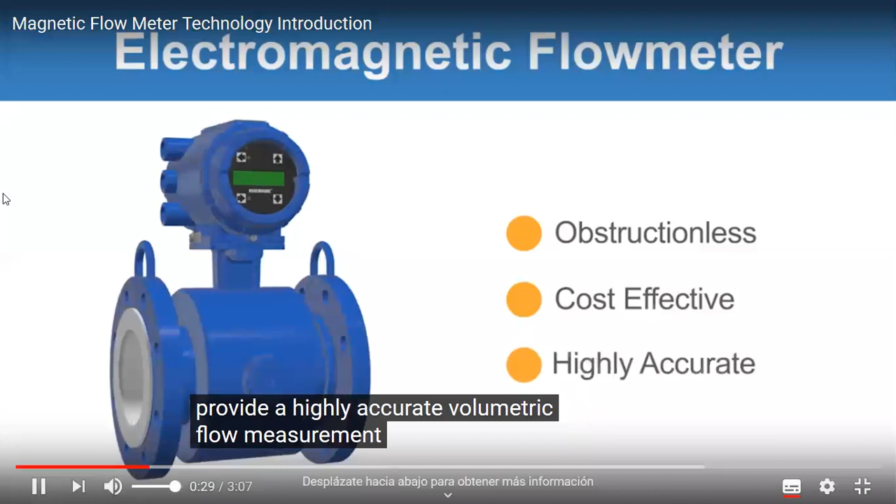Oftentimes referred to as a mag meter. Mag meters are selected because they are obstructionless, cost-effective for aggressive chemicals and slurries, and provide a highly accurate volumetric flow measurement. Mag meters are comprised of a transmitter and sensor that together measure the flow. The mag meter sensor is placed in line and measures an induced voltage generated by the fluid as it flows through the pipe. The transmitter takes the measured voltage generated by the sensor, converts the voltage into a flow measurement, and transmits that flow measurement to a control system.

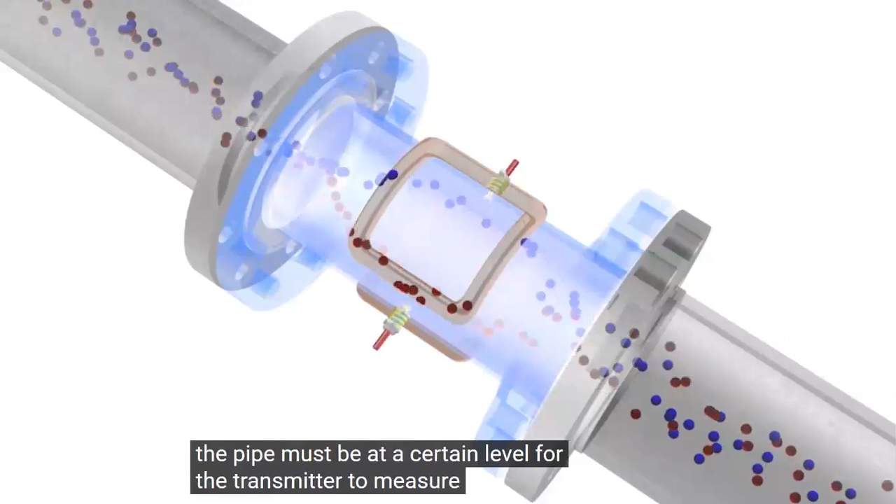To make the flow measurement, the mag meter utilizes a set of coils and a pair of electrodes. The mag meter's coils are driven by the transmitter with an applied current. Once powered, a magnetic field is formed between both coils. Once the pipe is full and the fluid begins to flow, the force of the magnetic field causes the negatively and positively charged particles of the fluid to separate as they pass through the magnetic field. This separation causes an induced voltage to be formed between the electrodes in the sensor. The conductivity or charge of the fluid in the pipe must be at a certain level for the transmitter to measure the induced voltage at the electrodes.

This flow principle is known as Faraday's law, mathematically defined by the equation E = kBDV, where the induced voltage E is directly proportional to the velocity V of the fluid moving through the magnetic field B. The induced voltage is carried to the transmitter through the electrode circuit. The transmitter then converts this voltage into a quantifiable flow velocity.

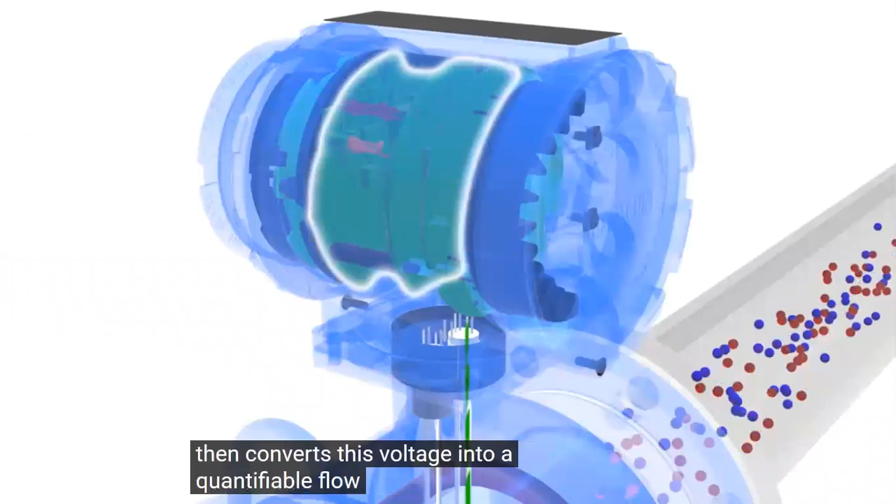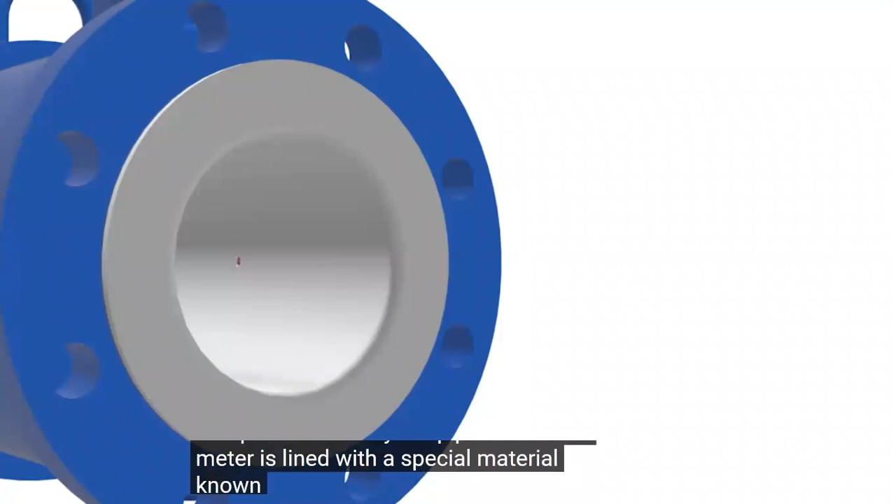With the known velocity along with the area of the pipe, the volumetric flow rate of the fluid is calculated. To prevent electrical shorts of the sensing component circuitry, the pipe of the flow meter is lined with a special material known as a liner. This liner, along with a selection of the proper electrode materials, is important to protect the sensor against abrasive and corrosive chemicals and solids.

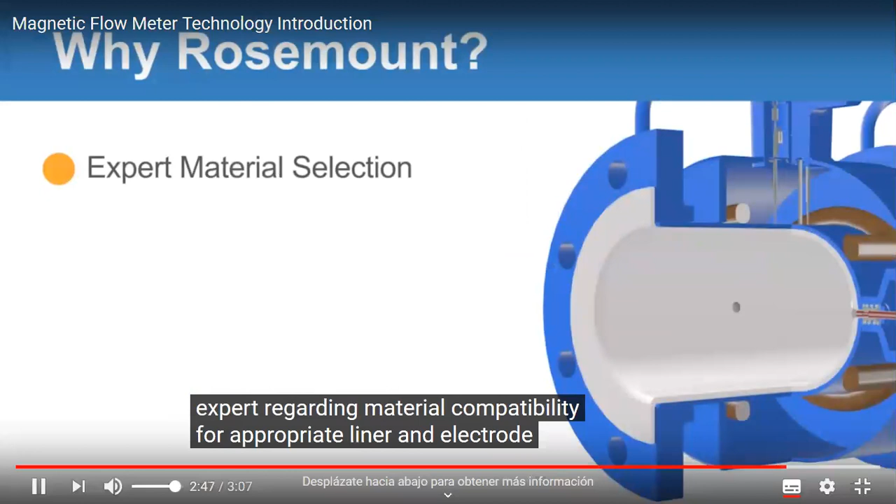One historical limitation of mag meters is the impact of process noise. Process noise occurs when particulates impacting the electrode interfere with the induced voltage measurement, generating a false reading. Rosemount has become a true expert regarding material compatibility for appropriate liner and electrode selection, and has advanced digital signal processing software to provide maximum measurement reliability for even the most challenging applications. Emerson Flow Measurement Technology.

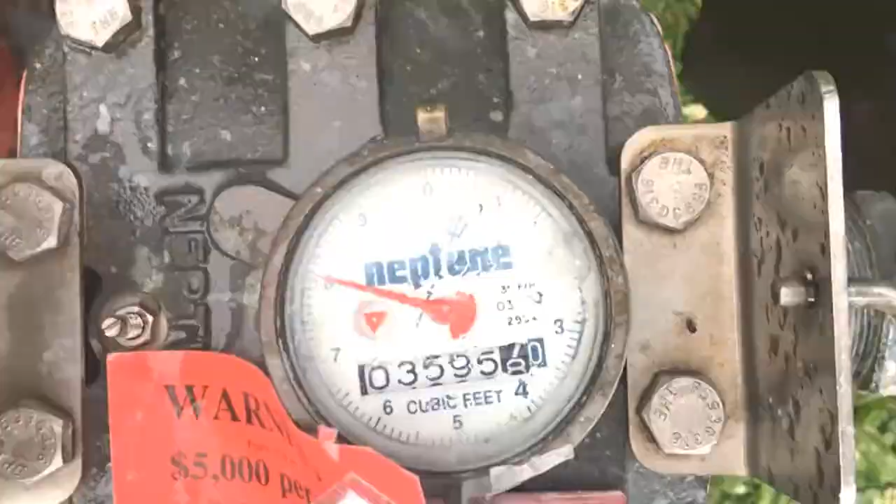Hey, I'm Grady. Today on Practical Engineering, we're building a magnetic flow meter. From metering the dose of a medicine in an IV, to measuring the flow of irrigation water on a farm, to tracking your fuel fill-up, flow meters play a role in nearly every area of our lives. In fact, there's probably a meter outside your home counting your water usage for your monthly utility bill.

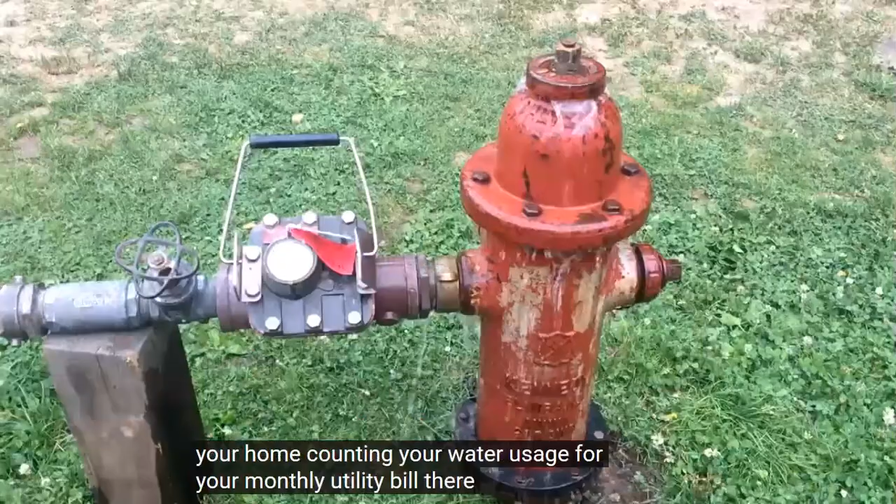There are a whole host of ways we can measure flow, but today I want to talk about a method I think is particularly fascinating: the magnetic flow meter. We'll walk through some of the electrical engineering behind this ingenious device and try to overcome the challenges that arise when the real world doesn't quite match the theory. But the theory comes first, so we'll start at the beginning.

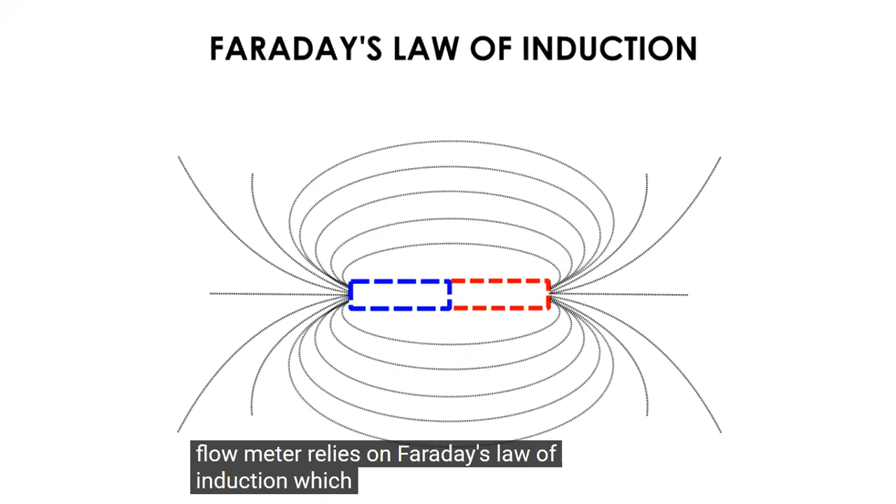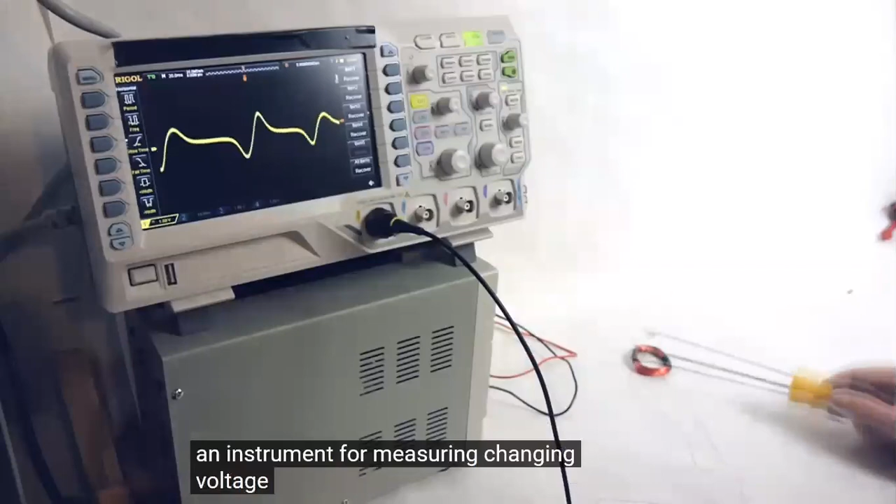A magnetic flow meter relies on Faraday's law of induction, which basically says this: moving a conductor through a magnetic field will generate an electromotive force, which is proportional to the velocity. Let's break that down just a bit with an example. I've got a magnet and a conductor, in this case a coil of wire. The conductor is connected to a new toy in the shop, an oscilloscope, which is an instrument for measuring changing voltage and displaying it on a screen. For example, here's a typical AC sine wave similar to what you'd measure at a wall outlet.

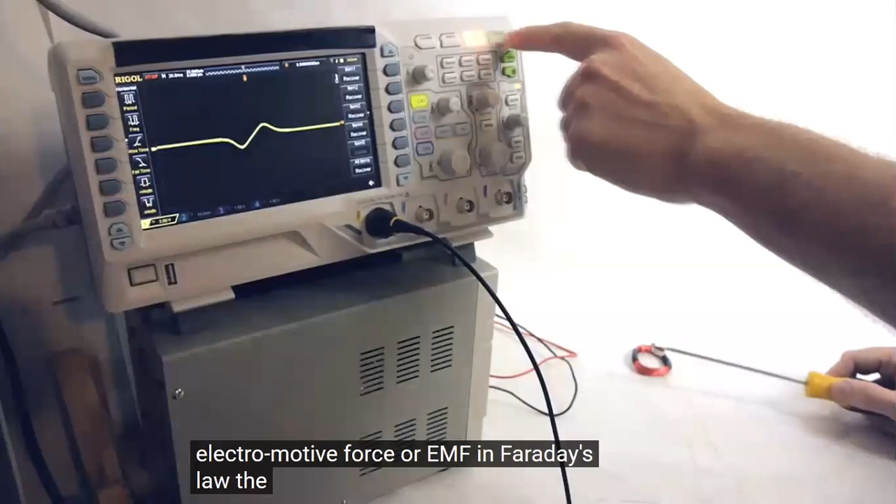If I keep the conductor still within the magnetic field, nothing happens. But as soon as I move the magnet, we see a spike in voltage. This is the electromotive force, or EMF, in Faraday's law. The faster the coil passes through the magnetic field, the higher the voltage spikes, demonstrating that the EMF is proportional to the velocity. A magnetic flow meter works exactly the same way, except instead of wire, the conductor is a fluid in a pipe.

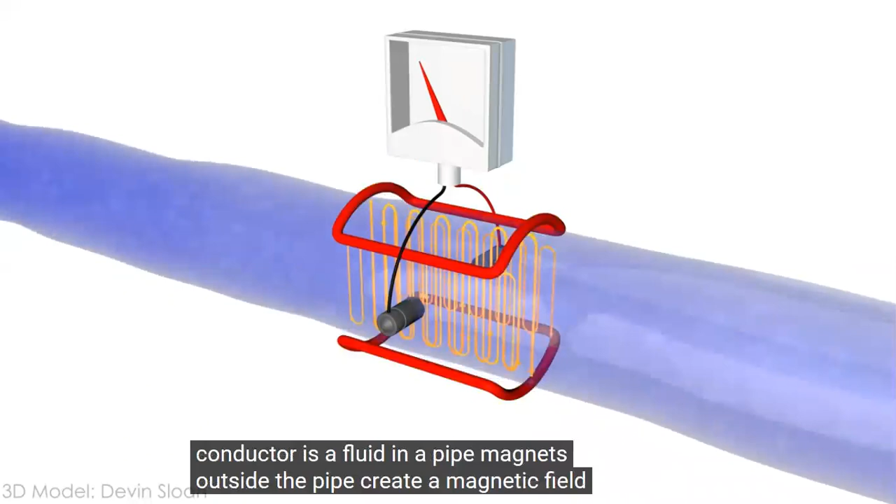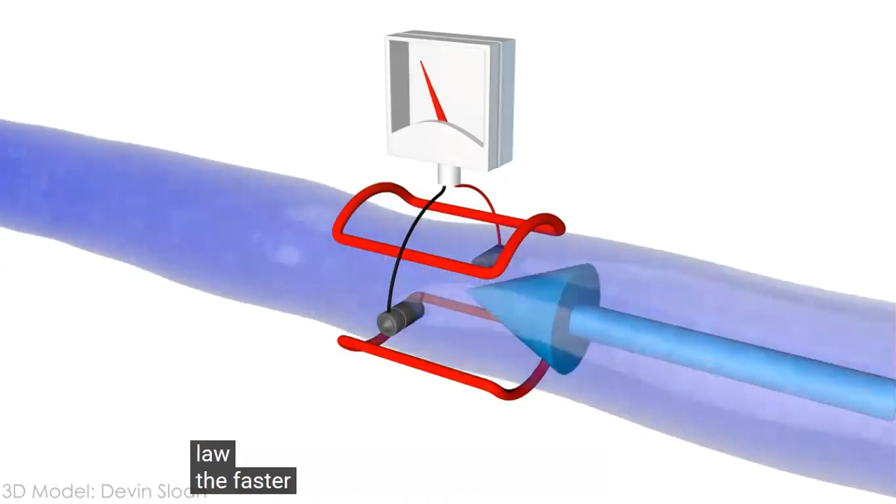Magnets outside the pipe create a magnetic field. Electrodes are located perpendicular to the magnets. A conductive fluid moving through the pipe will generate a voltage between the electrodes due to Faraday's law. The faster the fluid moves through the pipe, the higher the voltage. Once you know the velocity of the fluid, you can calculate flow using the cross-sectional area of the pipe. It seems pretty straightforward, but let's see if it really works.

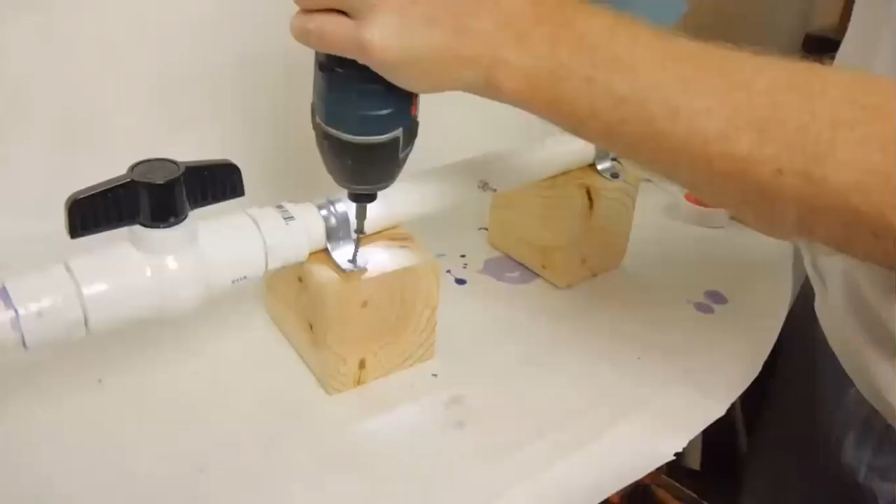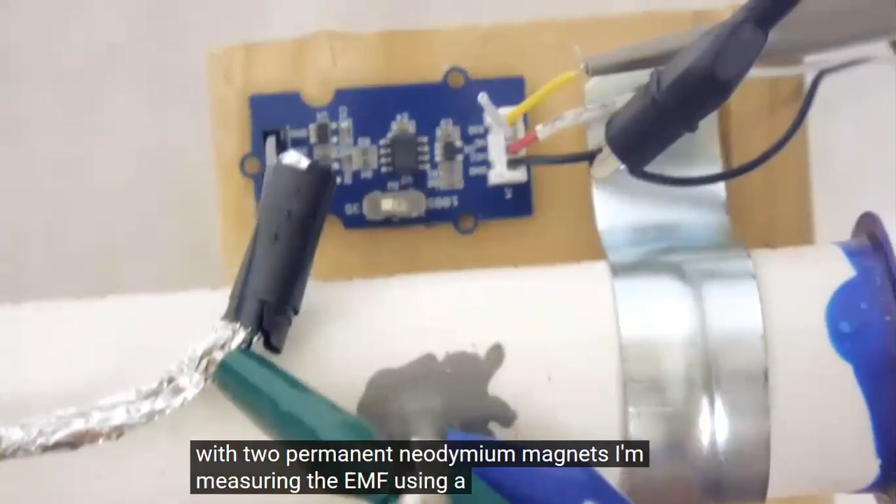I can control the flow of water using this valve. Two stainless steel bolts serve as electrodes to measure the EMF. And to create the magnetic field, I'm starting with two permanent neodymium magnets. I'm measuring the EMF using a differential amplifier to boost the signal into my oscilloscope. Watch what happens when I start to let the water flow through the pipe.

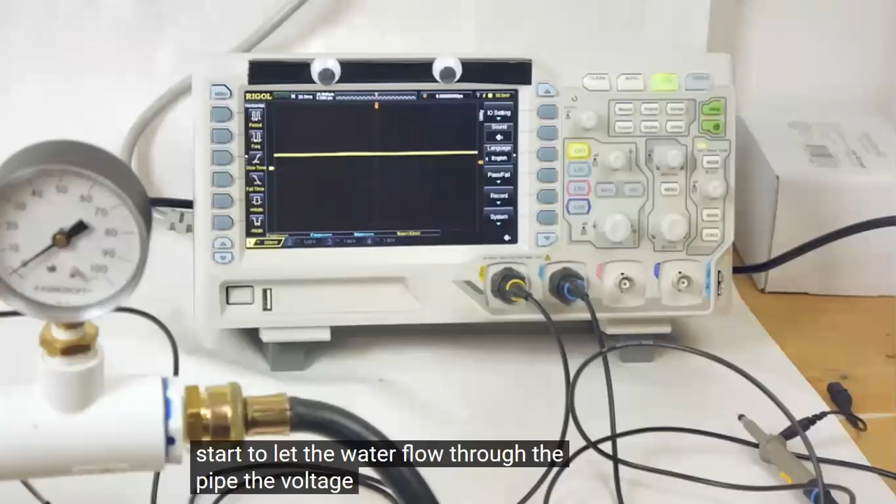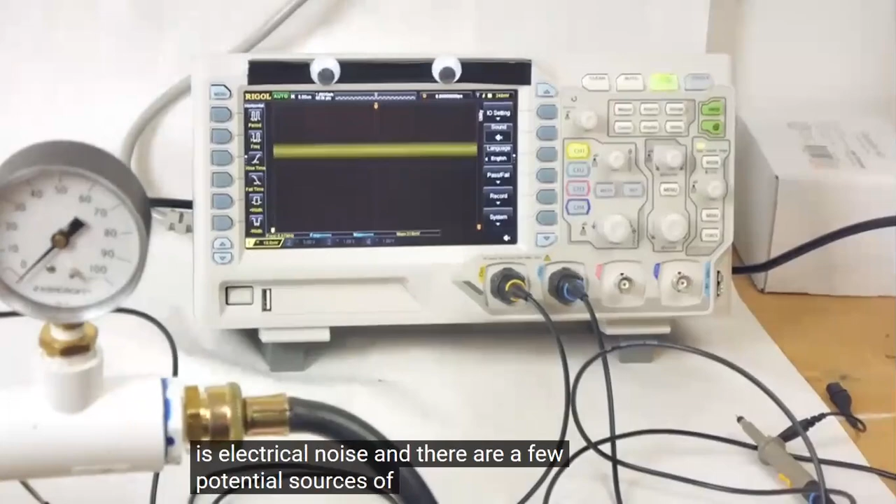The voltage jumps. We're definitely getting an electrical response to the flow of water, but you can see that we have a fairly noisy signal. It would be a major challenge to try and convert this signal into a flow reading. The problem is electrical noise, and there are a few potential sources of noise here. First, depending on the fluid chemistry and the type of metal used for the electrodes, an electrolytic reaction between the liquid and the electrode can generate an electric potential. Second, stray voltages can sometimes exist within the fluid from other equipment along the pipe, like the pump.

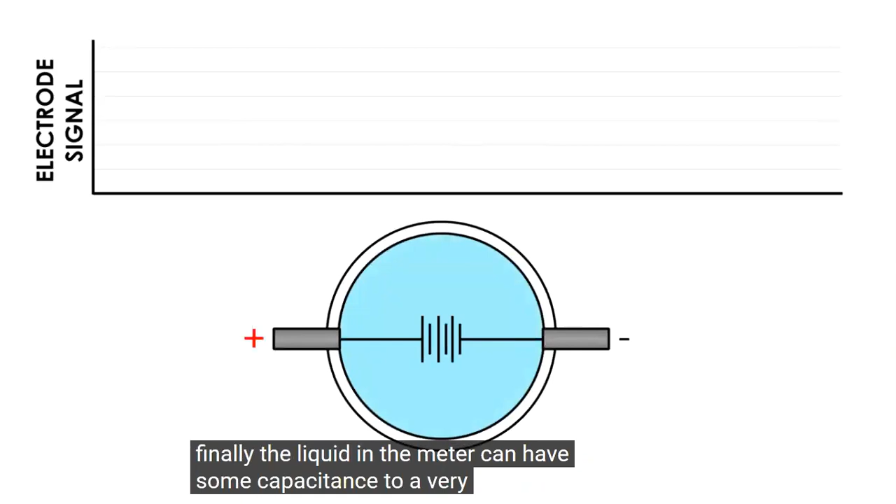Finally, the liquid in the meter can have some capacitance. To a very limited extent, it can actually charge up like a battery, which can create noise in the voltage signal between the electrodes. The problem is there's no way to know what part of the signal is due to the flow and what part is just noise.

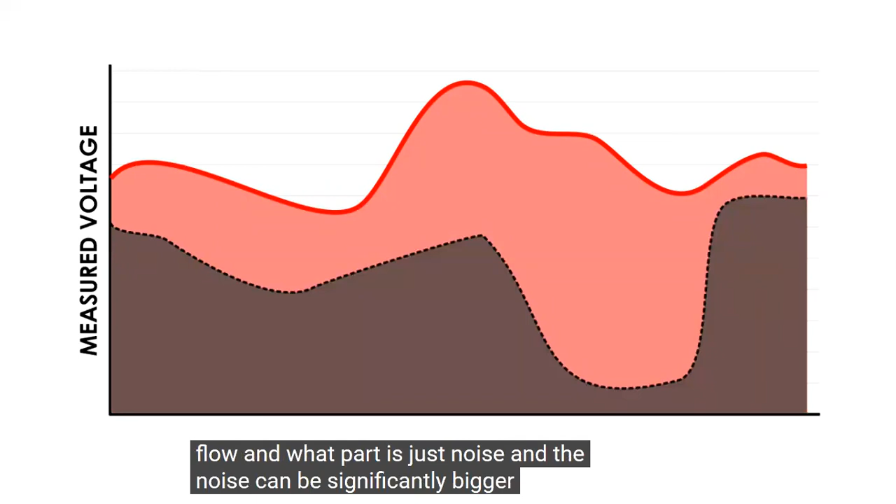And the noise can be significantly bigger than the part of the signal we actually care about. In electrical engineering, we would say that the signal-to-noise ratio is low. In other words, the theory behind the magnetic flow meter is sound, but the real world is getting in the way of things. This is where the physicists throw up their hands and the electrical engineers step in. And the electrical engineers have found that one way to avoid the issues mentioned above is to change the magnetic field over time. Here's how it works.

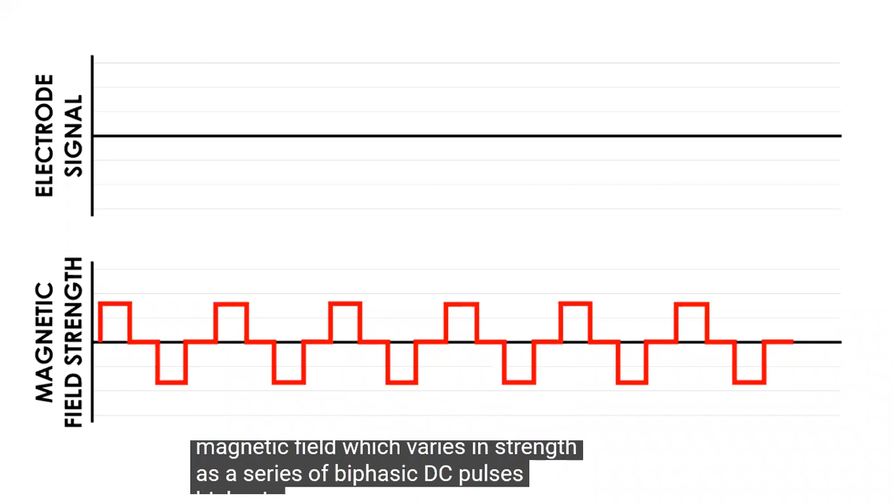This is a graph of a magnetic field which varies in strength as a series of biphasic DC pulses. Biphasic because it has negative and positive pulses, and DC because unlike a typical AC sine wave, which is constantly changing, the waveform only has two values, on or off.

Above is an example of the resulting EMF from the magnetic flow meter. Remember, we only care about the portion of the EMF generated by the magnetic field, since this is the only part of the signal which is proportional to the velocity of the fluid. Everything else is just noise.

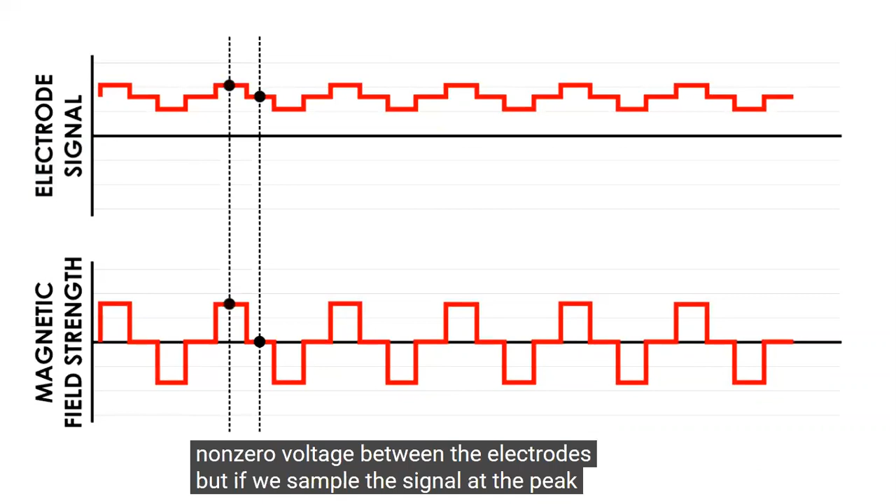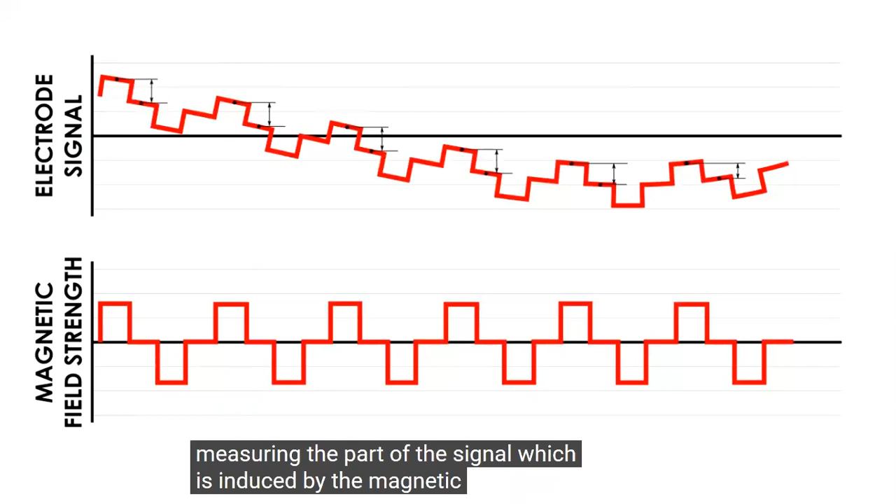Notice that even when there's no magnetic field, there may still be a non-zero voltage between the electrodes. But if we sample the signal at the peak of the magnetic field and subtract the voltage measured when the magnetic field is zero, we're left with only the part of the signal we care about. Even if the noise is changing over time, we're only measuring the part of the signal which is induced by the magnetic field.

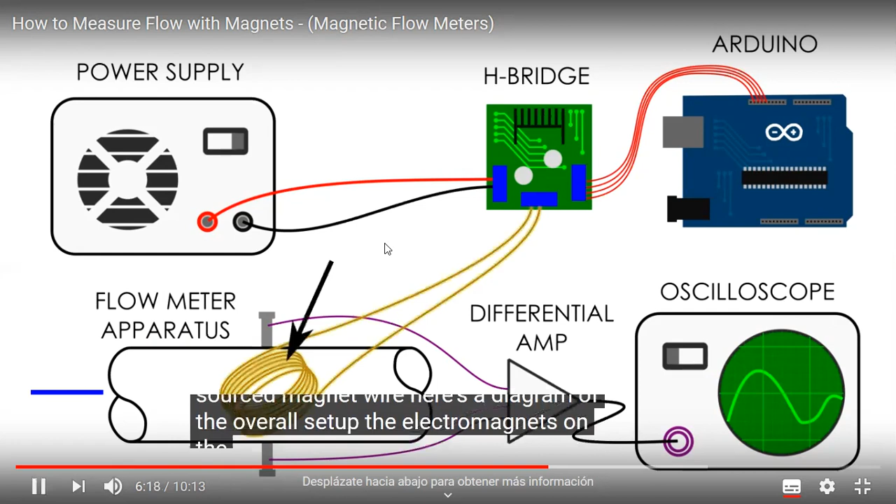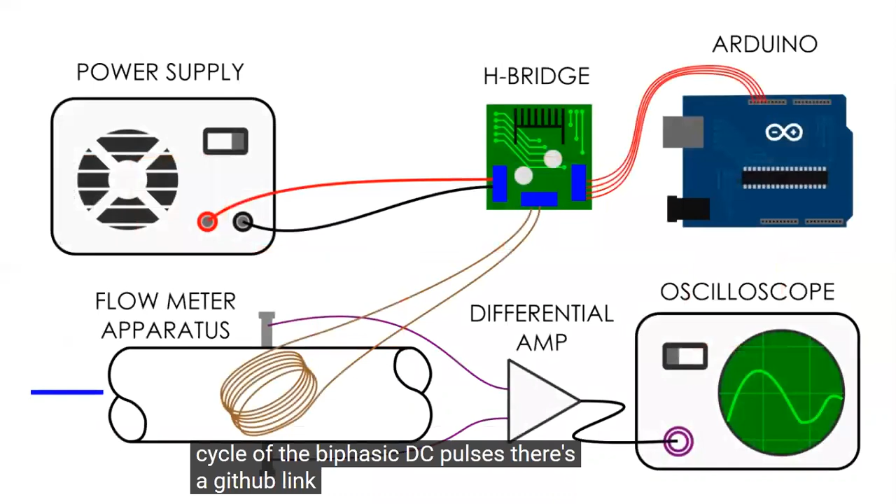This is a circuit that allows a small signal to control high current devices like electromagnets. The control signal in this case is provided by an Arduino. I've written some simple code so I can control the frequency and duty cycle of the biphasic DC pulses. There's a GitHub link in the description if you're interested in the code. The blue line shown here is the voltage waveform going to the electromagnets.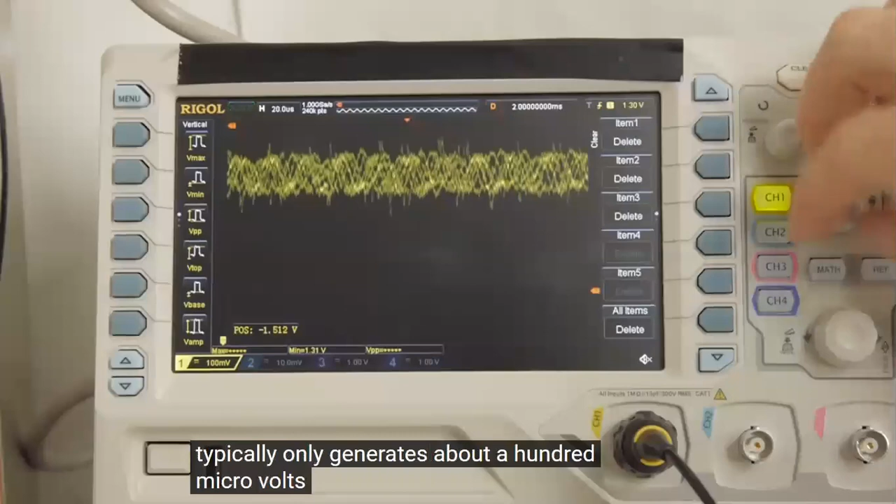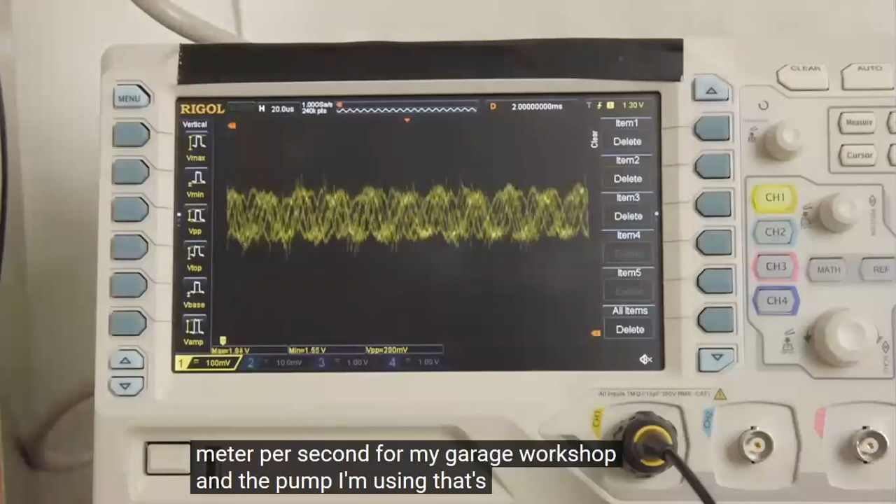Unfortunately, even with all the trouble, this setup wasn't quite strong enough to give me a reliable signal. From some literature I read, a well set up meter typically only generates about 100 microvolts for every foot per second of velocity, or about 300 microvolts for a meter per second. For my garage workshop and the pump I'm using, that's a needle in a haystack of RF noise and hum, especially considering that my crude apparatus can hardly be considered well set up. Every once in a while, if I was standing at just the right spot in the room, I could get a clean...

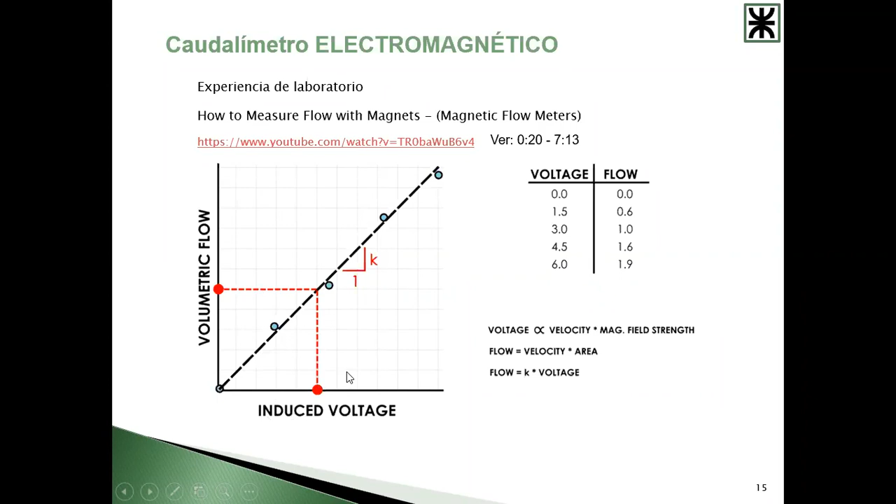Este instrumental para relacionar el caudal, lo que hace es contar la frecuencia de estos vórtices. Entonces vamos a usar la mecánica de fluidos para relacionar esa frecuencia de vórtices, que me va a generar pulsos, que lo voy a medir sobre este artefacto que pongo dentro del fluido. Esos pulsos de desprendimiento de vórtices me van a estar relacionando de alguna manera con el flujo que está circulando.

Vamos a ver algunos videos, acá tenemos dos. Este que está por acá es bastante cortito. Si no entienden, me preguntan, están en inglés, por ahí complica las cosas, pero son bien didácticos estos videos. Y si quieren que paremos, paramos y charlamos alguna cosa.

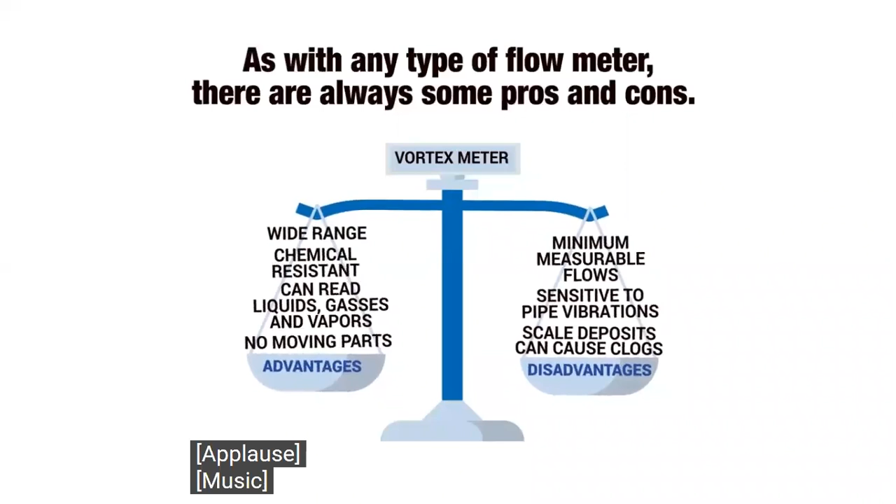Profe, ¿son muy precisos estos sensores? Y todo depende, o sea, depende del fluido que se utiliza. Es como cualquier instrumento de los que tuvieron que hacer ustedes la práctica. Depende si medís flujos pequeños o flujos grandes, pero sí, son precisos. Pero ahí depende del rango que estás midiendo. Pero sí, son buenos, se los utilizan.

A ver, vamos al siguiente. Este ya es más de una marca, de unos fabricantes.

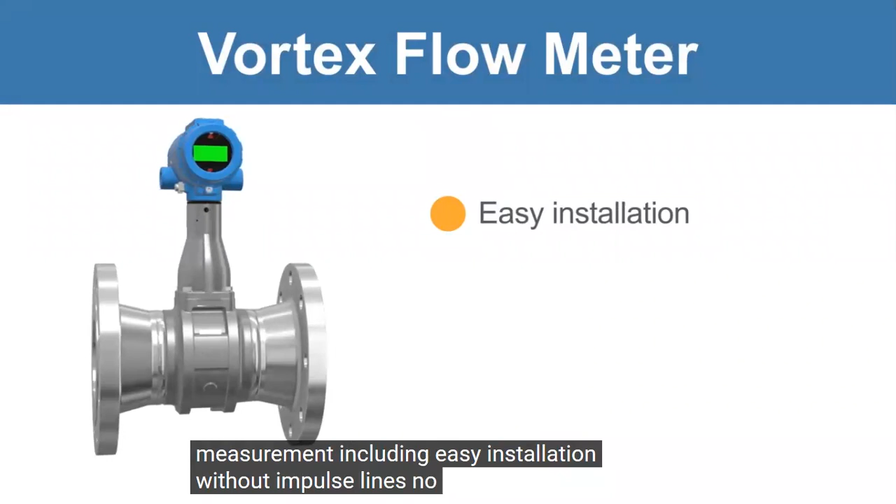And safely, there is an array of flow technologies available to make these measurements, including the vortex flow meter. Vortex meters offer many advantages for flow measurement, including easy installation without impulse lines, no moving parts to maintain or repair, less leak potential, and a wide flow turndown range.

¿Ves? Eso es importante, que no tienen elementos móviles, como una turbina o algo que se mueve que se puede desgastar. Al no tener algo mecánico que rote, que gire, tener partes que se desgasten, le da más vida útil, le da más seguridad al instrumento. Profe, y esa parte del pivot, lo que pivotea, ¿no es móvil?

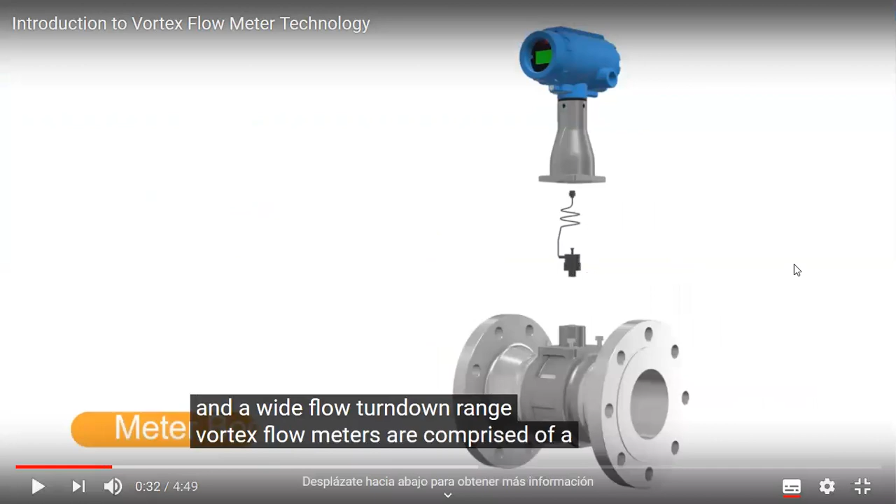¿Cómo? En el otro se mostró móvil. No, el elemento que se mete, que obstruye, es algo rígido que tiene alguna flexión, y lo que hace es medir, por lo general, la vibración de ese elemento. Eso flexiona un poco y me dice esa vibración. Se flexiona, no es que pivotea como... No, el gráfico anterior tenía como un ventiladorcito, eso en realidad creo que no se utiliza. Vamos a ver, que es más profesional el video, vamos a ver cómo lo miden.

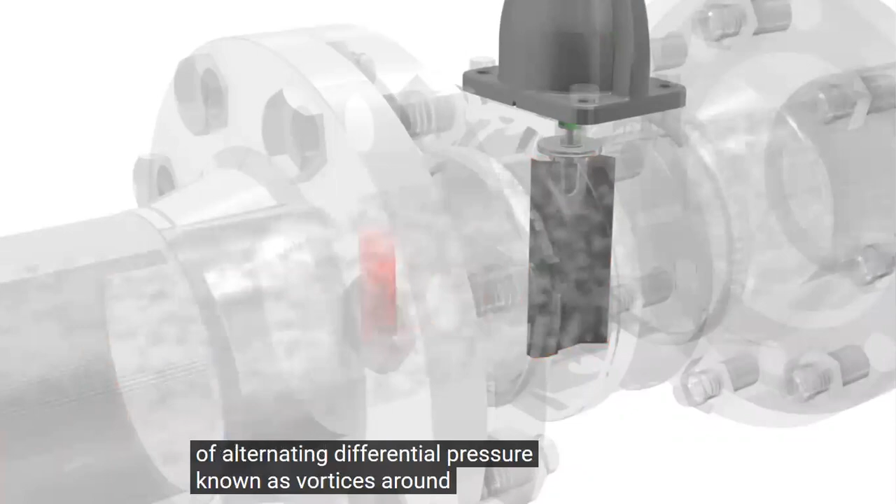Within a vortex flow meter, an obstruction in the flow path, often referred to as a shedder bar, causes process fluid to separate and form areas of alternating differential pressure, known as vortices, around the backside of the shedder bar. These vortices then cause a small sensing element either behind or within the shedder bar to oscillate back and forth at a specific frequency. The velocity of the working fluid is directly proportional to the frequency of the vortices generated by the shedder bar's unique geometry. Using the known cross-sectional area of the pipe, volumetric flow can be calculated. This flow principle is referred to as the von Karman effect, a proportionality constant which relates the frequency of the alternating vortices to flow rate.

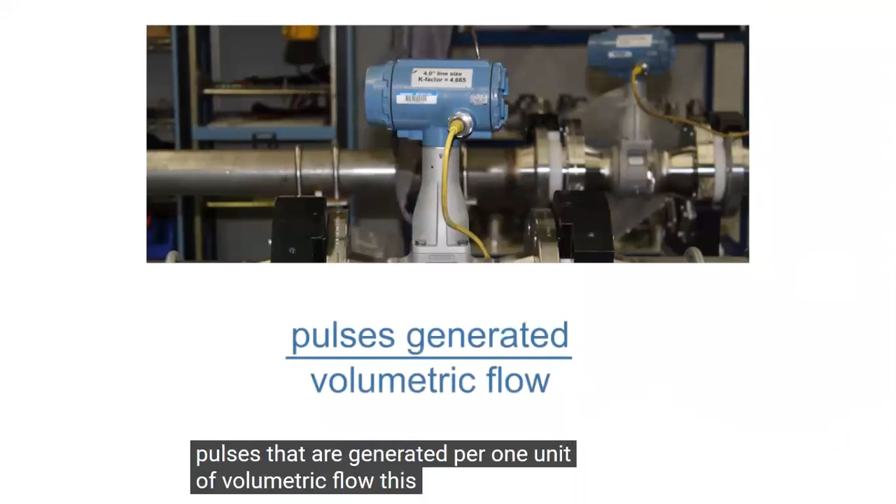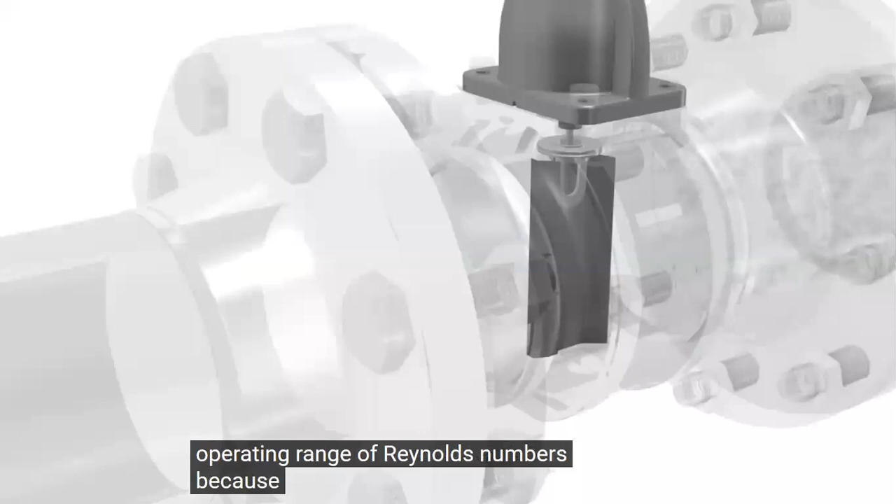The calibration constant is formed in a flow lab by measuring the amount of pulses that are generated per one unit of volumetric flow. This calibration constant is accurate over a wide operating range of Reynolds numbers. Because vortices must form in order for the vortex technology to pick up a signal, an adequate ratio of inertial forces to viscous forces must exist. If not, the meter will read no flow when the fluid is flowing.

Once a mechanical signal has been formed by the vortices passing by the shedder bar, a sensing element takes the mechanical motion generated by the flexure and converts it into an electrical signal. This electrical signal is then passed from the sensing element through a circuit up to the electronics board stack, where it is then processed and turned into a quantifiable velocity reading. This signal is then outputted to the vortex's local display and out to the control system.

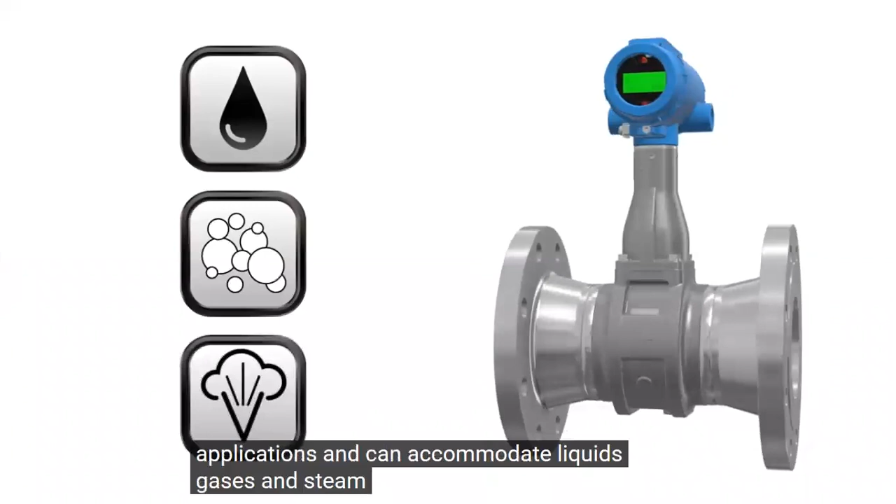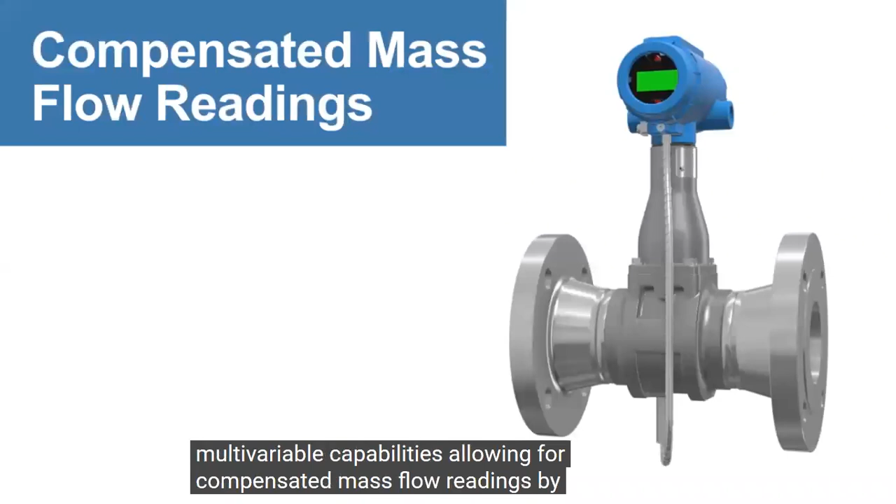Vortex flow meters are well suited for a wide range of applications, and can accommodate liquids, gases, and steam, while being able to withstand high process pressures and temperatures. Vortex flow meters are also a two-wire device, making them efficient with respect to power consumption. Vortex meters are available in a variety of meter body configurations and multivariable capabilities, allowing for compensated mass flow readings. By measuring additional variables such as pressure or temperature, along with the volumetric flow reading, fluctuations in density can be accounted for to provide an accurate mass flow reading.

Compensated vortex flow meters can prove to be especially useful in saturated and superheated steam applications, along with liquid applications in which a fluid is nearing its saturation point. Low flow cutoffs and minimal measurable flows can pose an issue to vortex technology. One solution to this limitation is utilizing a vortex flow meter known as a reducer.

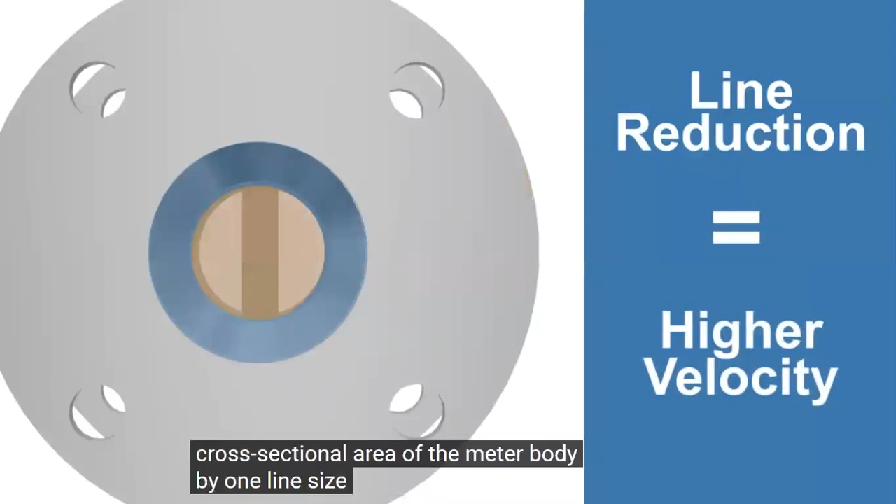This configuration decreases the cross-sectional area of the meter body by one line size, yielding a higher velocity through the pipe. With a higher velocity passing by the shedder bar, lower flow rates can be accurately measured. Reducer vortex flow meters use the same face-to-face dimensions as standard flanged vortex meters, which decreases cost by eliminating the need for field-installed piping reductions.

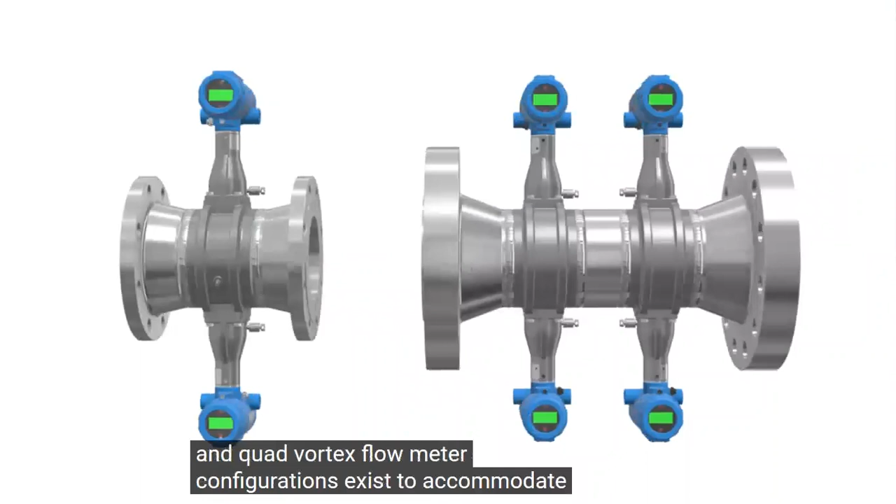For chemical plants and refineries, safety instrumented systems, or SIS applications, are critical to keep a plant running smoothly and safely. Dual and quad vortex flow meter configurations exist to accommodate these types of applications by providing redundant, independent sensors and electronics. This provides redundancy for common modes of failure and helps protect against spurious trips that these plants may experience.

Emerson's Rosemount vortex flow meters offer unmatched reliability using an all-welded, all-cast design with online removable sensors for enhanced safety and maximum process availability. Emerson also offers the widest selection of materials to provide a tailored solution for any process or utility challenge.

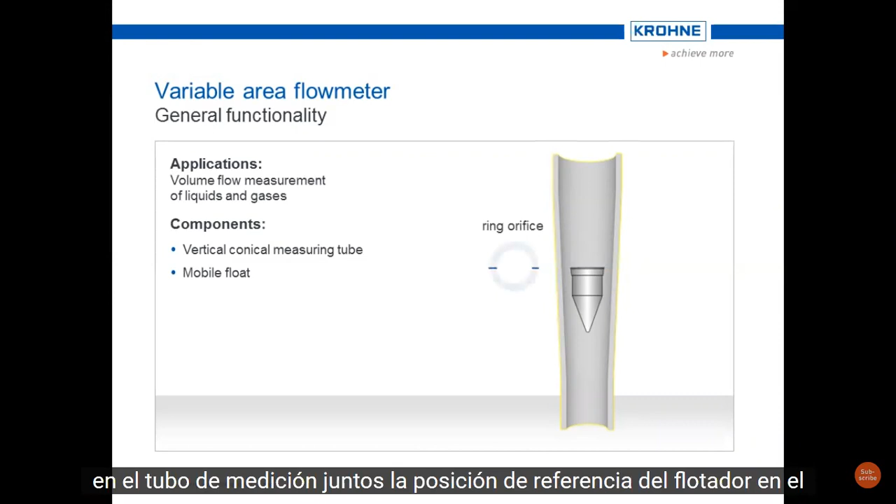Together, the reference position of the float and the measuring tube create a variable ring orifice. The higher the position of the float, the larger the ring orifice, and therefore the cross-sectional area through which the medium can flow past the float. This is the origin of the English designation of the device.

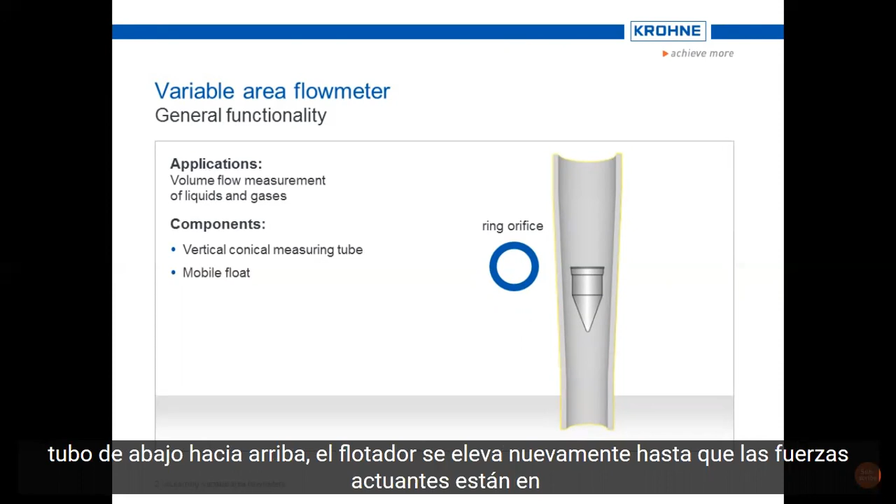When there is no flow, gravity keeps the float at the bottom end of the measuring tube. As soon as the medium flows through the tube from bottom to top, the float rises until the acting forces are in balance. I'd like to explain this in more detail.

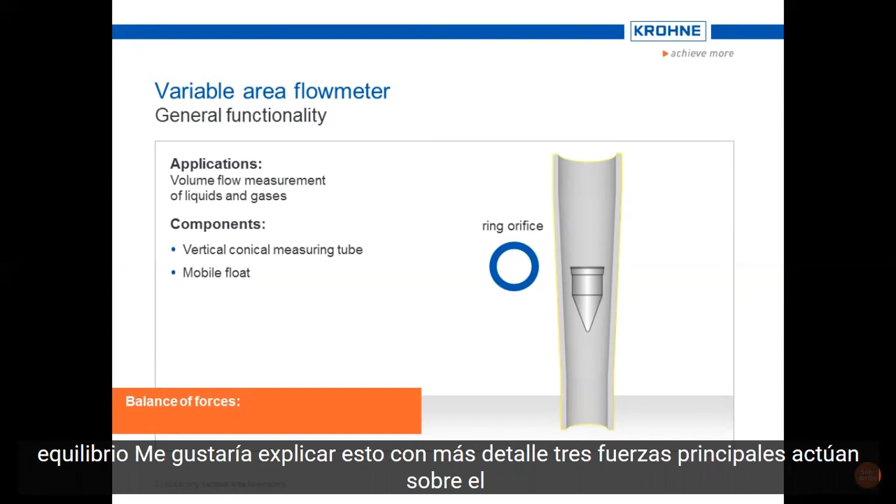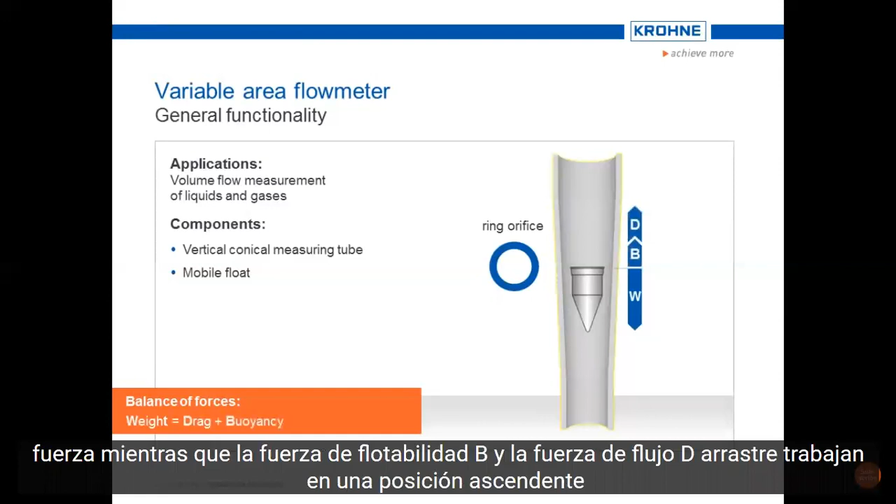Three main forces act on the movable float. The gravitational force W, weight, operates downwards as the reset force, whereas the buoyancy force B and the flow force D, drag, work in an upward direction. The position of the float is a flow indicator.

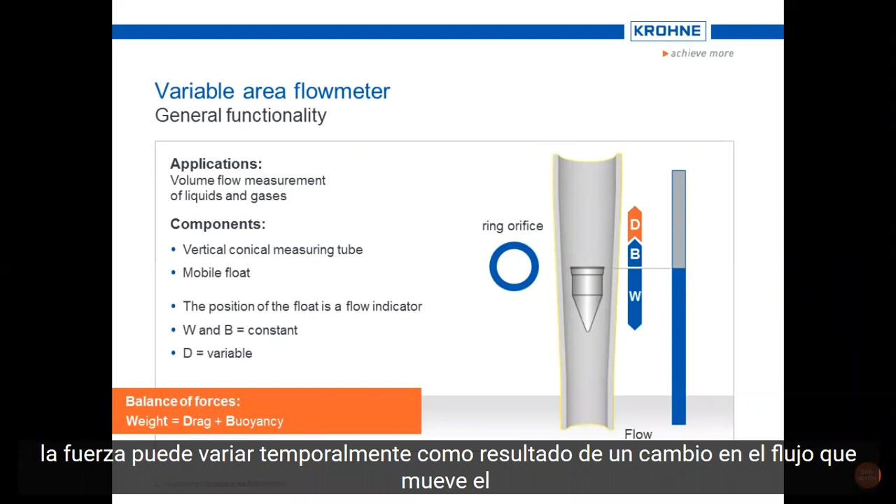The gravitational force and the buoyancy force are constant for a specified application. Only the flow force can vary temporarily as a result of a change in flow which moves the float into a different position.

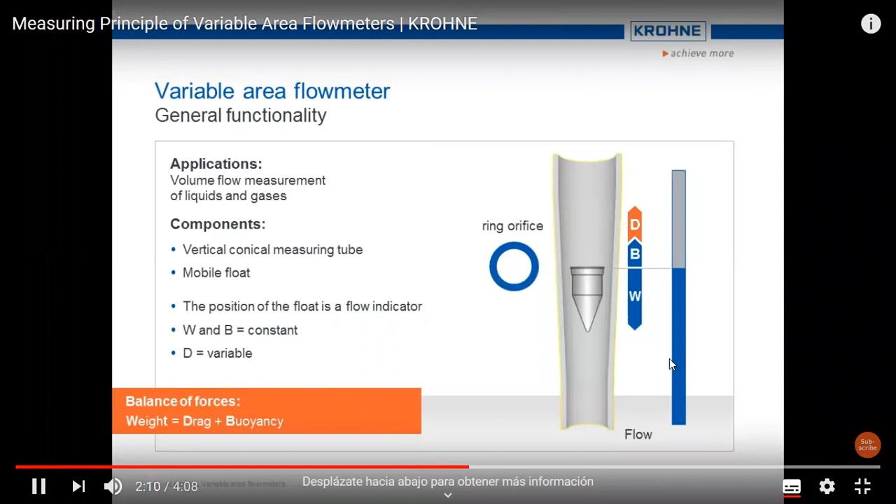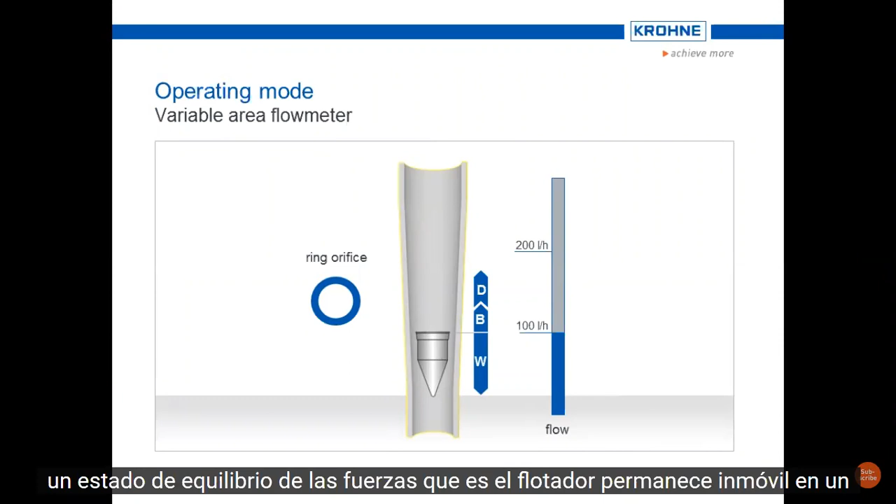I would like to illustrate this with an example. Let's take as our starting point a state of equilibrium of the forces. That is, the float remains immobile in a certain position with constant flow. If the flow increases, the flow velocity in the ring orifice also increases. Correspondingly, the flow force as well.

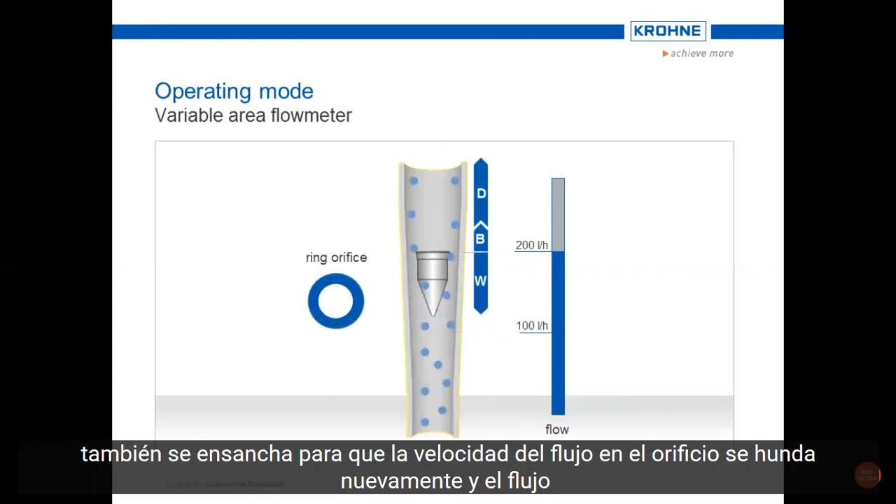The float rises. With the higher position of the float, the ring orifice, however, also becomes wider. So the flow velocity in the orifice sinks again, and the flow force returns to a state of equilibrium. The physical operating mode shows that the position of the float is a flow indicator.

With glass cones, the flow rate can be read on a scale on the measuring tube itself. With metal cones, the float is not visible, so they have a magnetic transfer onto the pointer. For this purpose, a magnet is built into the float.

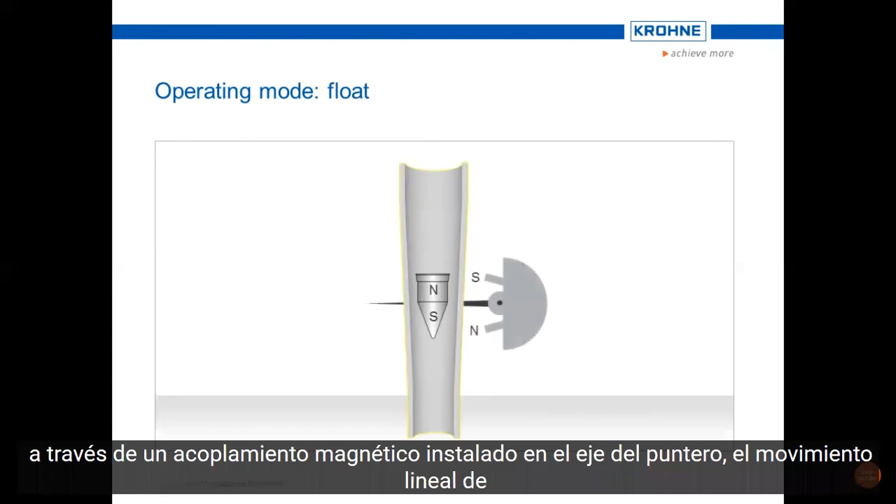Through a magnetic coupling installed on the pointer axis, the linear movement of the float is converted into the rotary movement of the pointer, which displays the flow on a scale. Once again, no auxiliary power supply is required.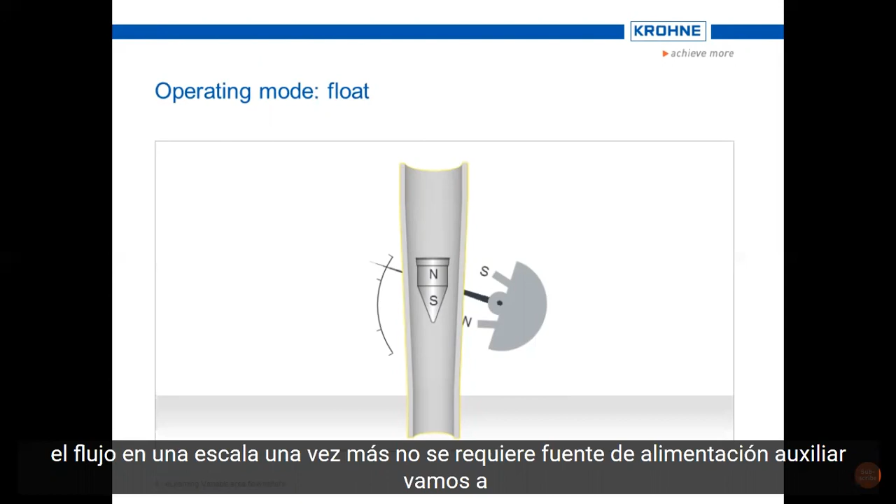Let's sum up again. The example illustrates that the operating mode of a variable area flow meter to measure and display flow is purely mechanical and without auxiliary electrical power. This is an important unique selling point of variable area flow meters.